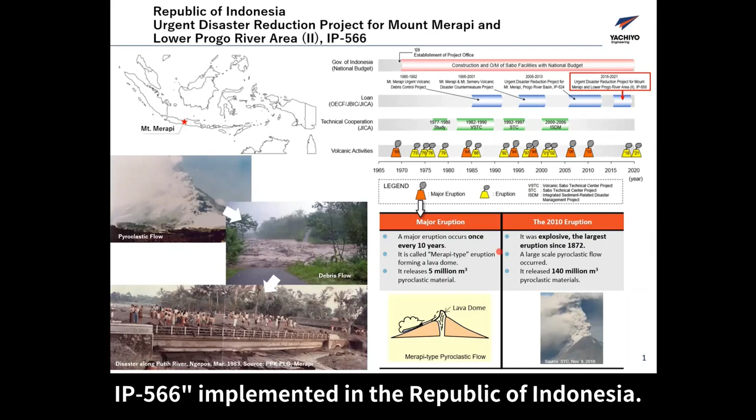I was involved in the consulting services for the Urgent Disaster Reduction Project for Mount Merapi and Lower Progo River Area 2, IP566, as team leader. I would like to introduce this Minister's Award-winning project, implemented in the Republic of Indonesia.

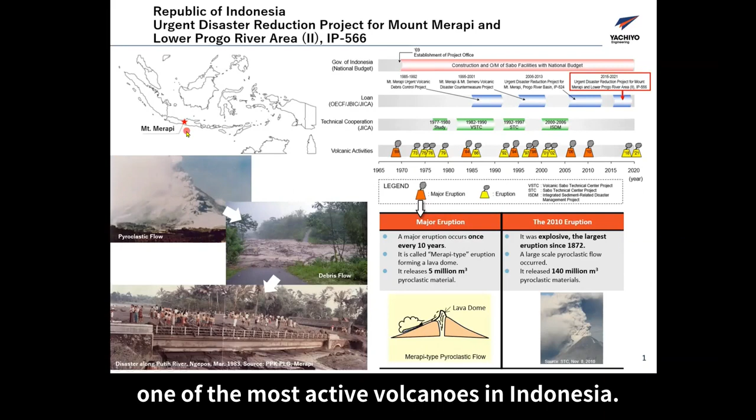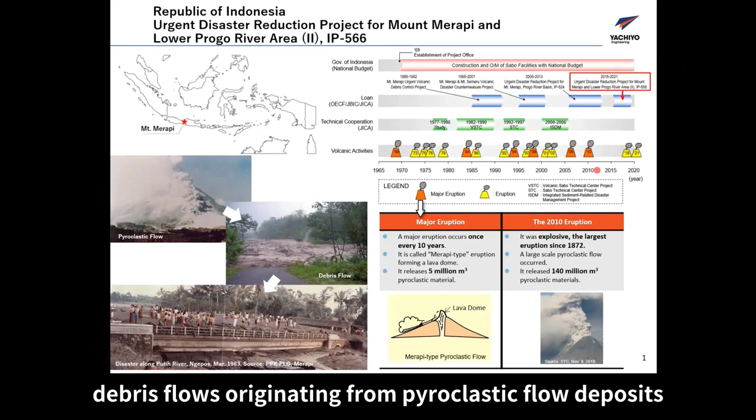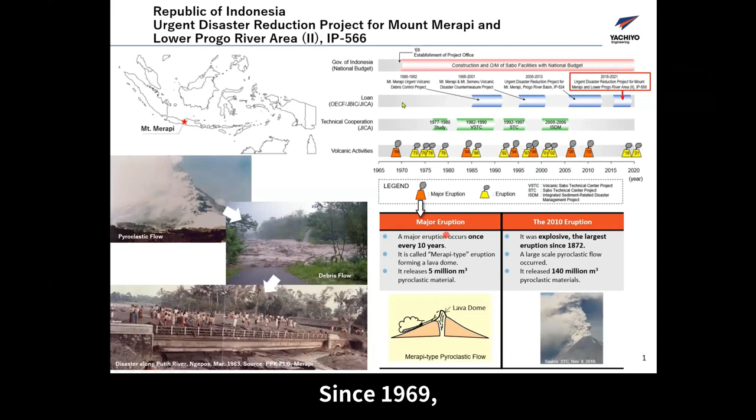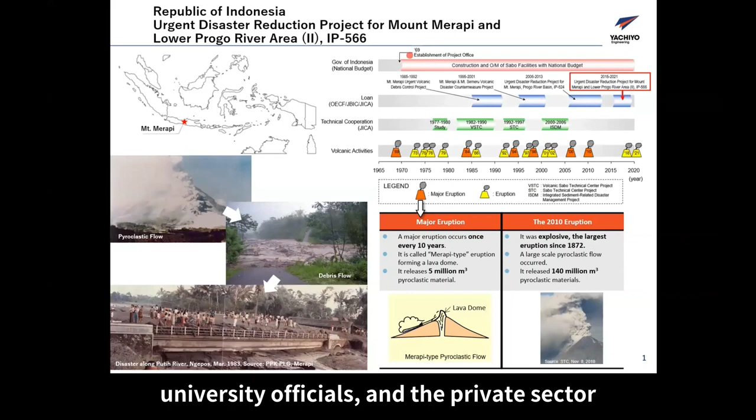Merapi volcano in the central part of Java Island is one of the most active volcanoes in Indonesia. Usually, a major eruption occurs once every 10 years. After major eruptions, debris flow originating from pyroclastic flow deposits frequently occurs, causing disasters in the foothill areas. Since 1969, various technical cooperation efforts have been made by the governments of Japan and Indonesia, university officials, and the private sector to deal with debris flow disasters.

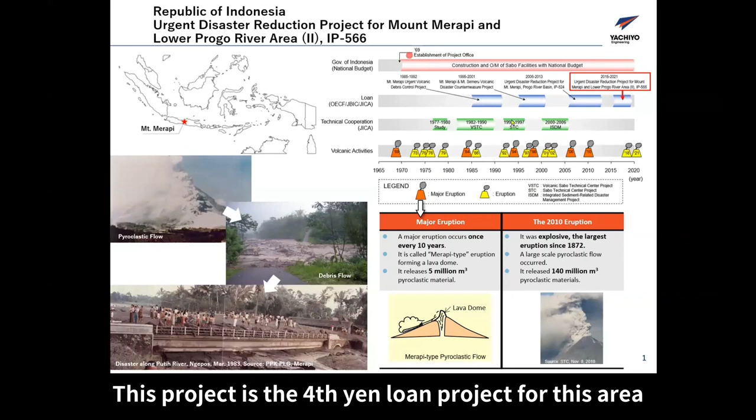This project is the fourth yen loan project for this area, addressing the increased risk of debris flow disaster after the 2010 eruption.

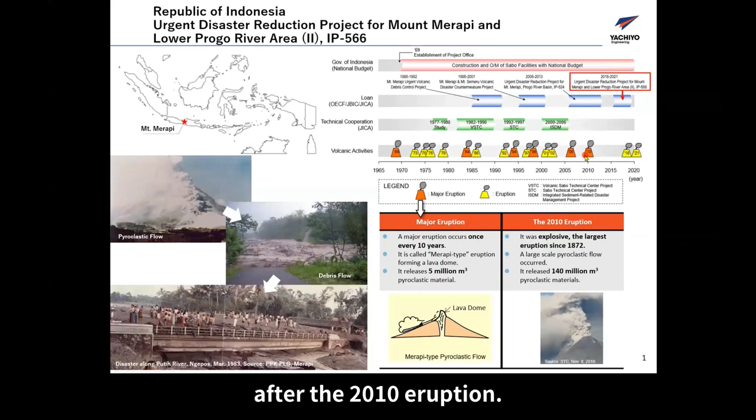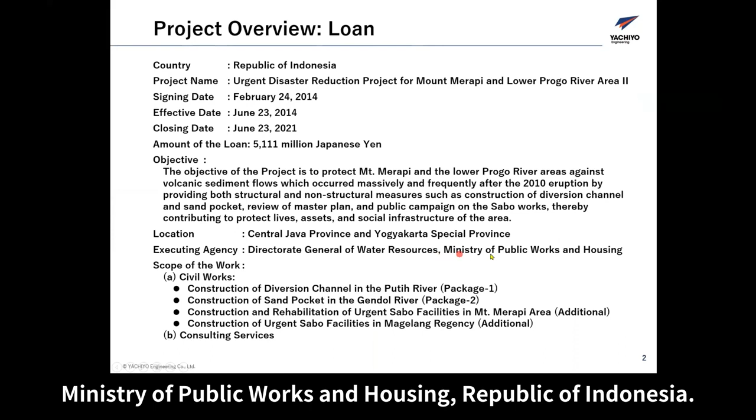This is an overview of the loan. The executing agency was the Directorate General of Water Resources, Ministry of Public Works and Housing, Republic of Indonesia. The scope of work consisted of 4 civil work packages and consulting services.

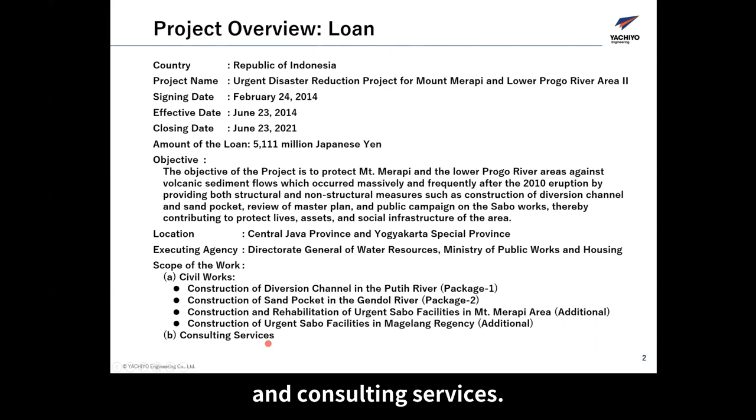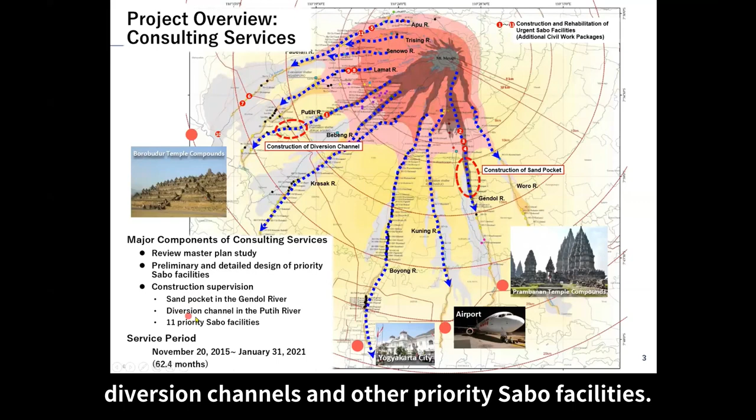The main components of the consulting services were the review master plan study to reflect the topographic change caused by the 2010 eruption, preliminary and detailed design of priority sabo facilities, and construction supervision of the sand pocket, diversion channel, and other priority sabo facilities. This figure also shows the important targets to be protected surrounding Mount Merapi.

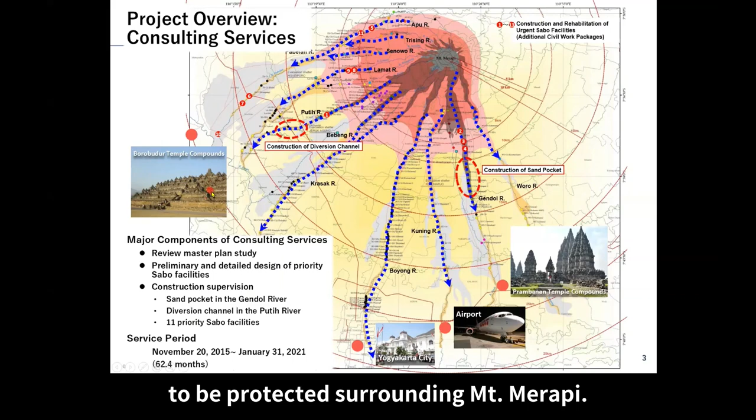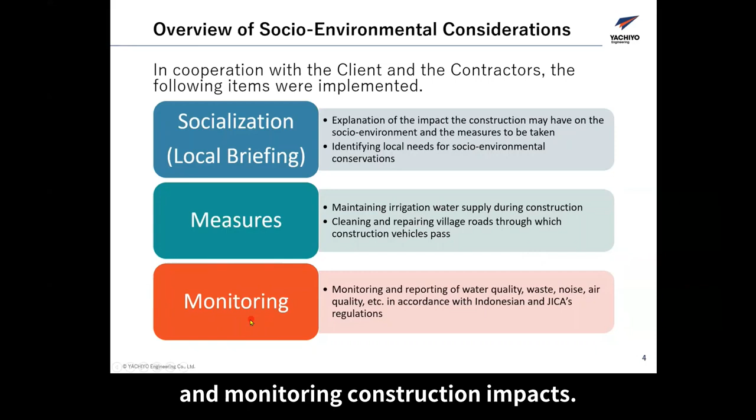For socio-environmental considerations, we as consultants assisted in explaining the project to the local community, identifying needs, implementing measures, and monitoring construction impacts. A key issue during construction was maintaining the existing irrigation water supply.

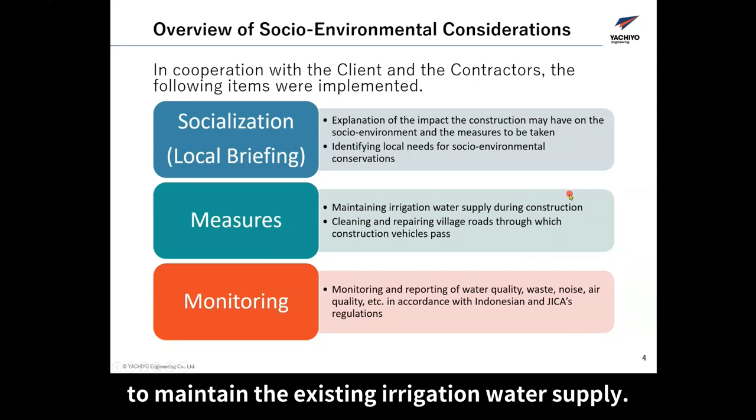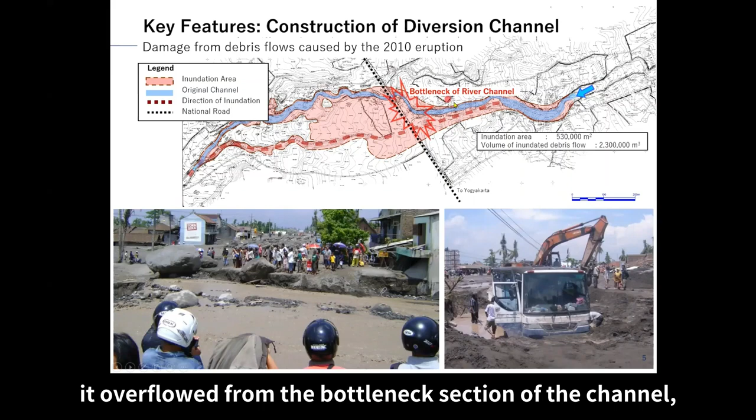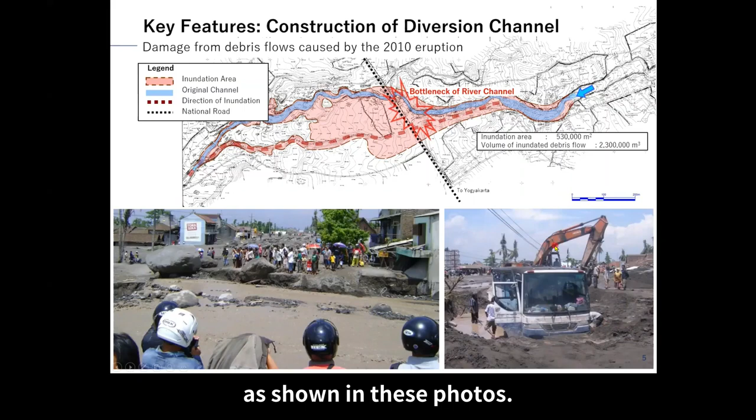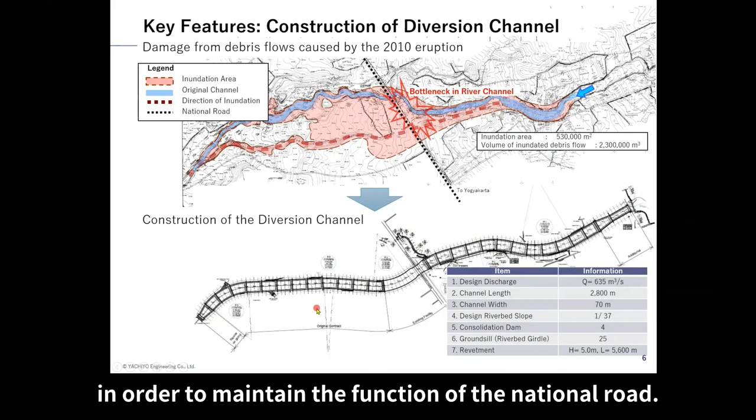Next, I will discuss the features of several sabo facilities constructed under this project. This is the case of the diversion channel on the Putih River. Before construction, every time debris flow occurred, it overflowed from the bottleneck section in the river channel, causing blockage of the national road, as shown in these photos. Therefore, a 2.8 kilometer long diversion channel was planned and constructed to widen and straighten the river channel in order to maintain the function of the national road. This was the first channel in Indonesia designed for debris flow peak discharge.

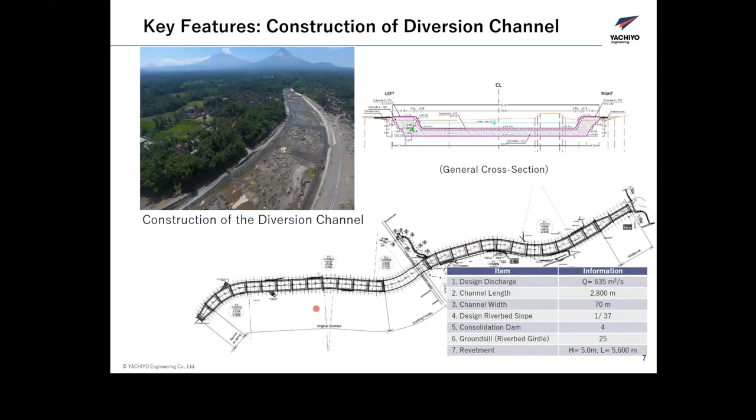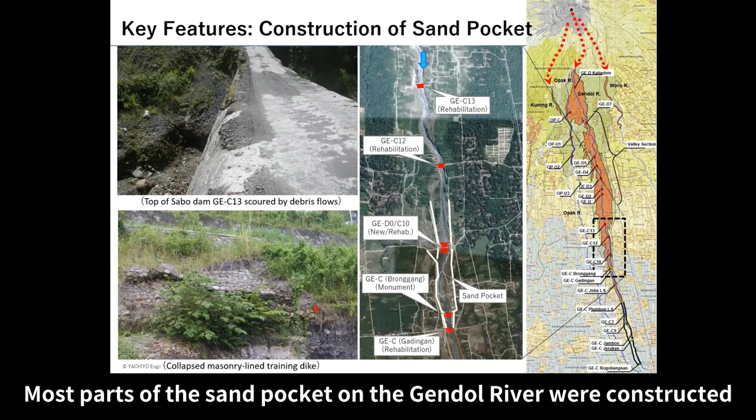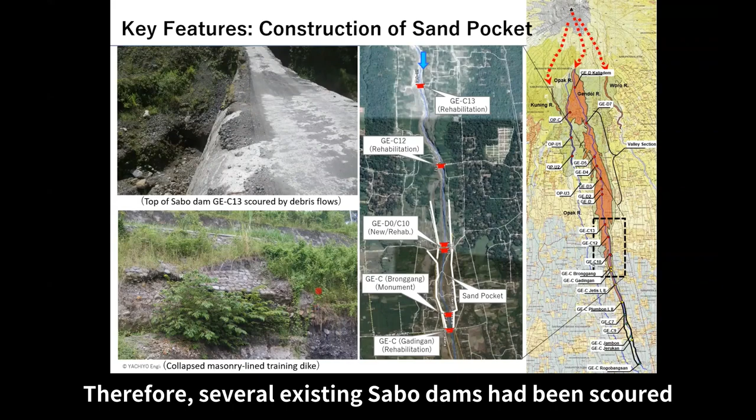This is the other case, the sand pocket on the Gendol River. A sand pocket is a sabo facility used to deposit and store debris flow. It consists of several sabo dams and training dikes. Most parts of the sand pocket on the Gendol River were constructed in the 1970s and 1990s. Therefore, several existing sabo dams have been scoured by frequently occurring debris flow, and training dikes had also collapsed in some parts, like this.

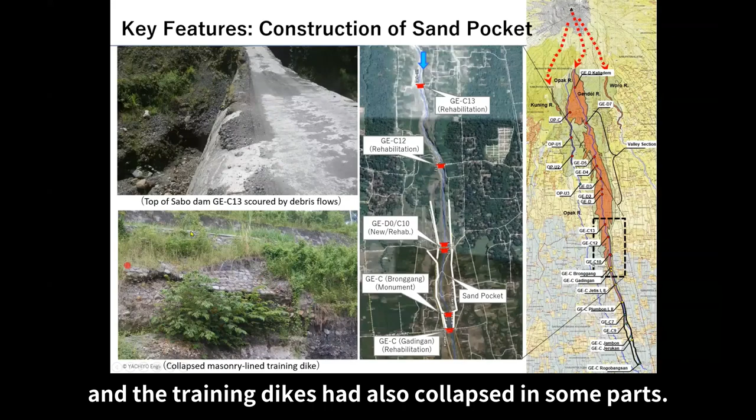The damaged parts of the sabo dams and training dikes were repaired, and the function of the sand pocket was enhanced under the project.

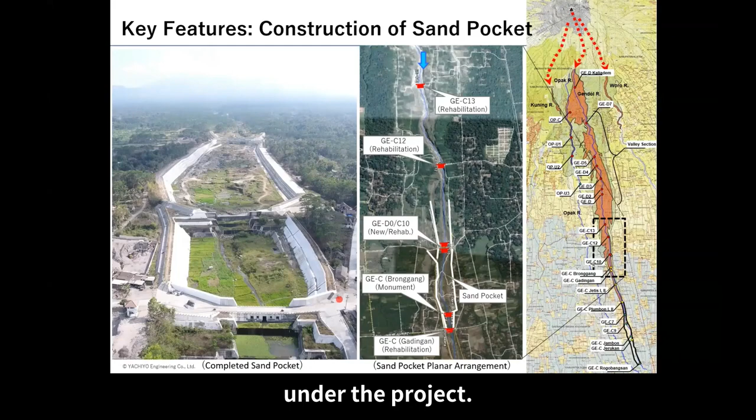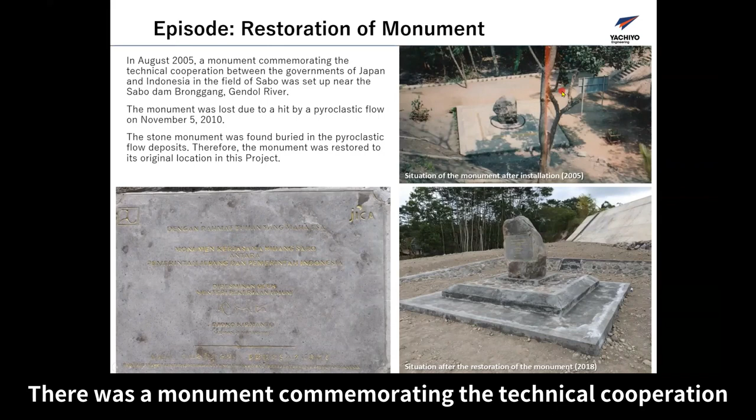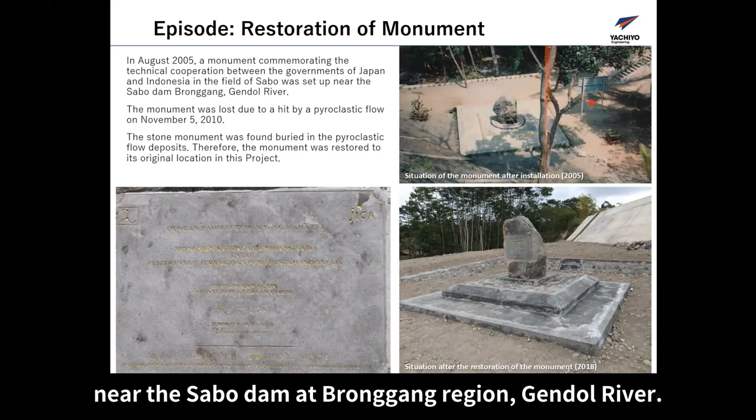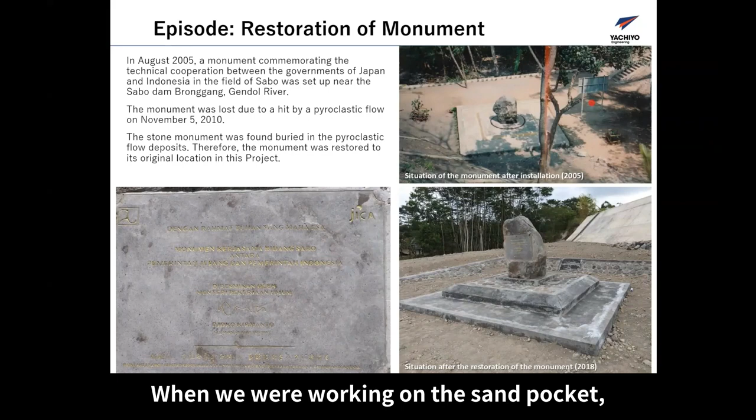Next, I would like to share one episode related to the project. There was a monument commemorating the technical cooperation between the governments of Japan and Indonesia in the field of sabo, near the sabo dam at Bronggang region, Gendol River. But it was lost due to a direct hit by a pyroclastic flow on November 5th, 2010. When we were working on the sand pocket, we found that stone monument buried in the pyroclastic flow deposit. Therefore, the monument was restored to its original location in this project.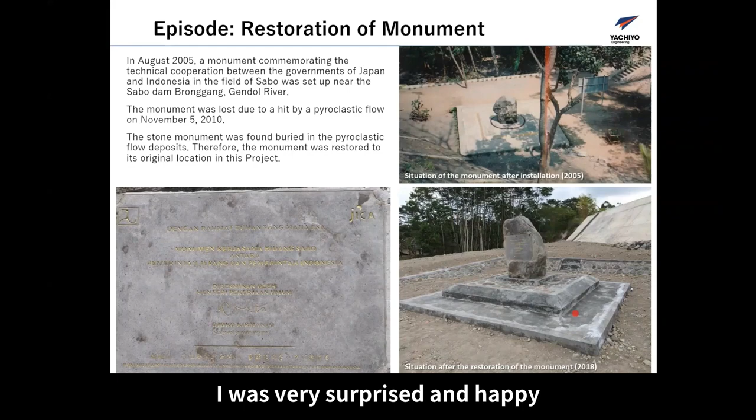Since pyroclastic flow deposits contained many large stones, I was very surprised and happy when I heard that the buried stone monument had been found. I hope that this monument will be maintained in the future as one of the historical memorials to the sabo project in this area.

That's all for my presentation.